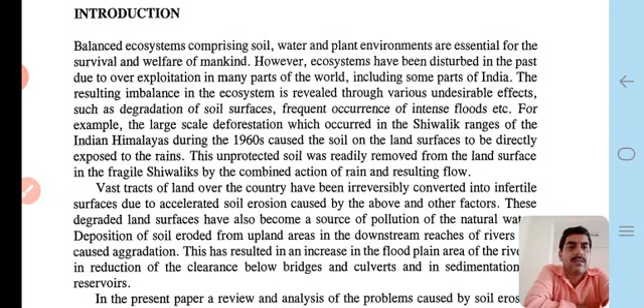The large scale deforestation which occurred in the Shivalik range of the Indian Himalayas during the 1960s era caused the soil on the land surfaces to be directly exposed to rain. This unprotected soil was readily removed from the land surface in the fragile Shivaliks by the combined action of rain and resulting flow.

Vast tracts of land over the country have been irreversibly converted into infertile surfaces due to accelerated soil erosion caused by the above and other factors.

These degraded land surfaces have also become a source of pollution of natural water. Deposition of soil eroded from upland areas in the downstream reaches of rivers has caused aggradation. This has resulted in an increase in the floodplain areas of the rivers, reduction of clearance below bridges and culverts, and sedimentation of reservoirs.

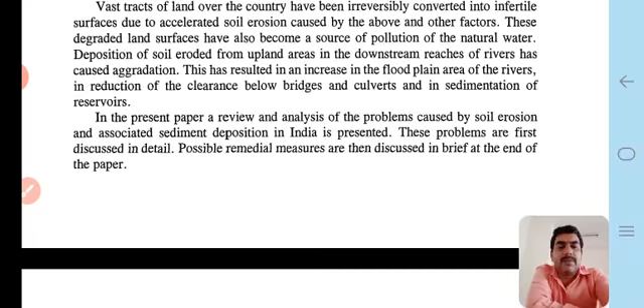Problems caused by soil erosion: in India, a total of 17,50,000 kilometers square out of the total land area of 3,280,000 kilometers square is prone to soil erosion.

This data is India's data. Thus, about 53% of the total land area of India is prone to erosion. Narayana and Ram Babu also discussed this in their research in 1983.

Areas affected by soil erosion in India can be broadly grouped into two categories: firstly the Himalayan and lower Himalayan regions, and secondly other regions. Two types of region occur here: the Himalayan and lower Himalayan region,

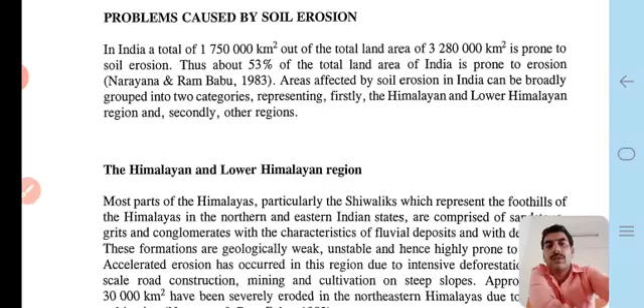most parts of the Himalayas, particularly the Shivaliks, which represent the foothills of the Himalayas in the northern and eastern Indian states, are comprised of sandstone, grits and conglomerates with the characteristics of fluvial deposits and deep soils. These formations are geologically weak, unstable, and hence highly prone to erosion.

This type of soil is erosion-prone, easily eroded. Accelerated erosion has occurred in this region due to intensive deforestation, large scale road construction, mining and cultivation on steep slopes.

Approximately 30,000 kilometers square have been severely eroded in the northeastern Himalayas due to shifting cultivation, as reported in the Narayana and Ram Babu paper published in 1983.

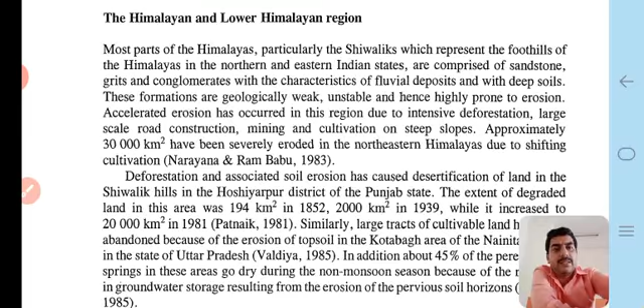Deforestation and associated soil erosion has caused desertification of land in the Shivalik Hills in Hoshiarpur district of Punjab state. The extent of degraded land in the area was 194 km square in 1852, 2000 km square in 1939, while it increased to 20,000 km square in 1981, as per Patnaik's research paper.

Uttar Pradesh, Valdiya 1985: in addition, about 45% of the perennial hill springs in these areas go dry during the non-monsoon seasons; only in the monsoon season are they in wet conditions. This is because of the reduction in groundwater storage resulting from the erosion of the pervious soil horizons, as published by Valdiya in 1985 in a journal paper.

Landslides are another dominant cause of soil erosion and related problems in the Himalayas, as shown in the figure provided in the map on the next slide.

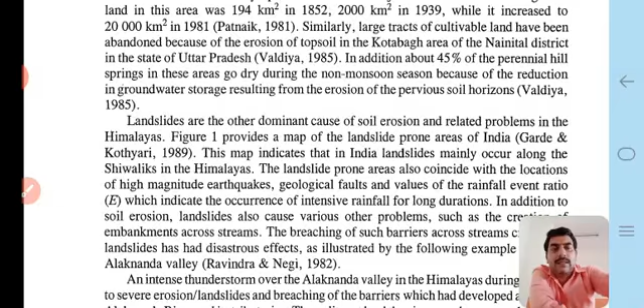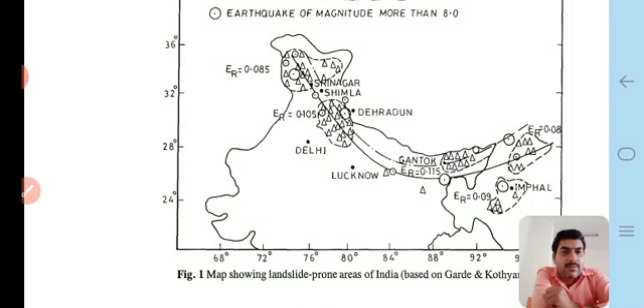In the next slide, this is the Himalaya region, showing earthquakes of magnitude more than 8 on the Richter scale. There is a map showing landslide-prone areas of India based on Garde & Kothyari, Gangtok, Dehradun region, which can be seen here in this region, and this region.

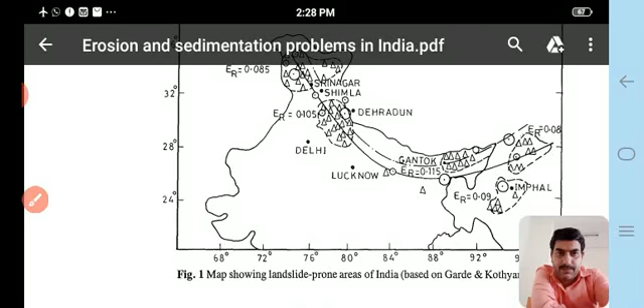Okay, they all are basically soil erosion prone areas, where the soil is eroded easily by the condition of the monsoon.

Thus, the upper Ganga canal, which diverts water from the Ganga at Haridwar, had to carry a very heavy sediment load. The consequences of the heavy sediment load entering the canal are discussed in the next slides.

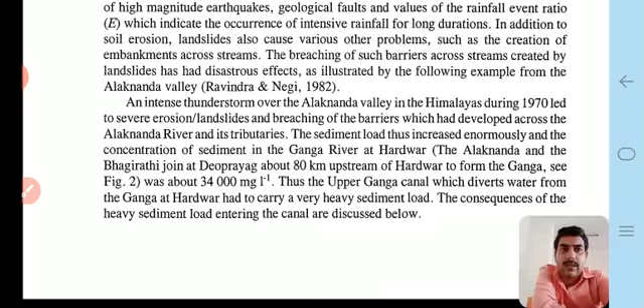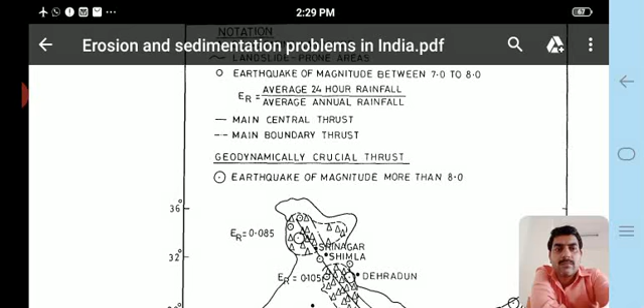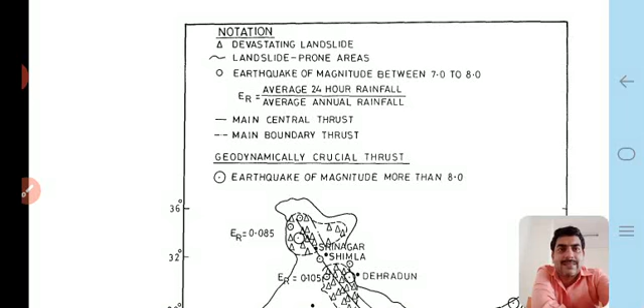Notations: the delta sign denotes, which you see here, okay, devastating landslides. The zigzag line shows landslide prone areas. Circles represent earthquakes of magnitude between 7 and 8, and ER is the average 24 hour rainfall upon the average annual rainfall.

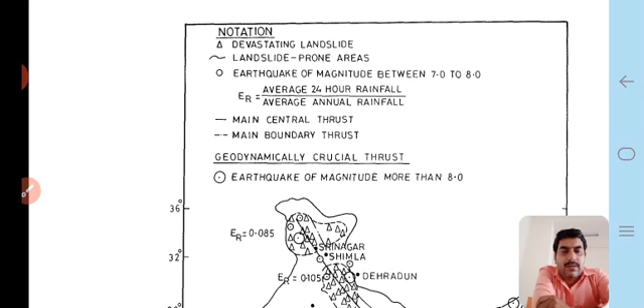The main central thrust is the clear line, and the dotted line is the main boundary thrust. Geodynamically, the crucial thrust is represented by a circle and below, in between, a dotted line.

The other regions of India affected by severe erosion include the severely eroded gullied lands along the banks of the rivers Yamuna, Chambal, Mahi, and other west flowing rivers in Gujarat state, and the southern rivers, namely the Cauvery and the Godavari river systems. Sheet and rill erosion is the most severe problem in the catchments of these rivers.

As a result, agricultural production is greatly affected on the red soils, which cover an area of 7,20,000 km² in the basins of the Chambal and Godavari. The depth of these soils is limited to 200 millimeters. In most of these areas, the lateritic soils, which are associated with rolling and undulating topography, have been found to lose about 4,000 ton km⁻² of valuable topsoil annually due to erosion in peninsular India, per research by Ram Babu.

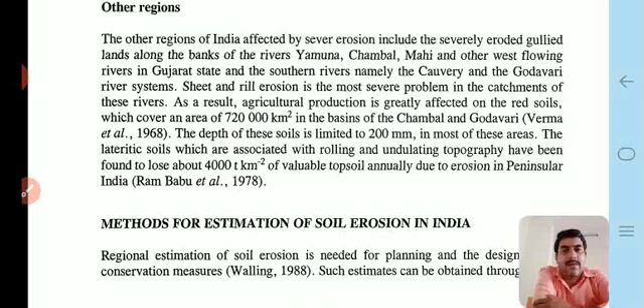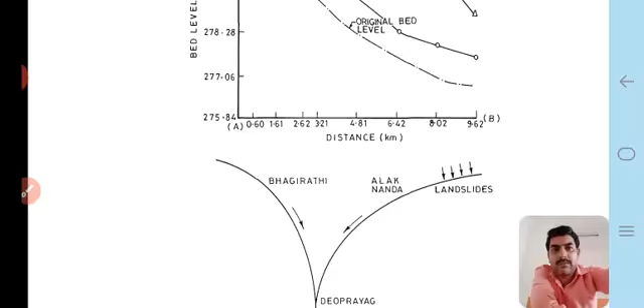Methods for estimation of soil erosion in India. Many methods here. Measurement through the use of estimation procedures, surveys for determination of soil erosion rates from catchments and deposition rates in reservoirs are frequently conducted by various governmental agencies in India, that is the ICAR and CBIP. Measurements of sediment load are made in many rivers across the country by other government agencies, that is the Central Water Commission.

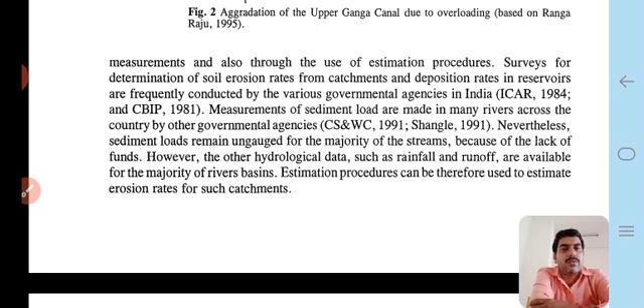All are to calculate how sediment is deposited in that particular region of the water bodies. However, other hydrological data such as rainfall and runoff are available for the majority of rivers. Basin estimation procedures can therefore be used to estimate erosion rates for such catchment areas. Okay,

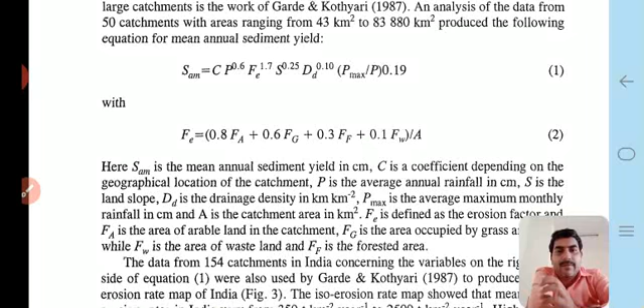and this is the basic formula to calculate the sediment yield, that is the SAM. Mean annual sediment yield in centimeters is equal to C P to the power 0.6, Fe 1.7, S 0.25, and Dd 0.1, and within bracket P max upon P, multiplied by 0.19. Okay, where Fe is 0.8 Fa plus 0.6 Fg plus 0.3 Ff plus 0.1 Fw upon A, where all notations are explained below. C is a coefficient depending on the geographical location of the particular catchment area.

P is the average annual rainfall in centimeters. S is the land slope. Dd is the drainage density in km⁻². P max is the average maximum monthly rainfall in centimeters, and A is the catchment area in km². Fe is defined as the erosion factor, and Fa is the area of arable land in the catchment. Fg is the area occupied by grass and scrub, while Fw is the area of wasteland, and Ff is the forested area. All notations represented in the formula are explained above.

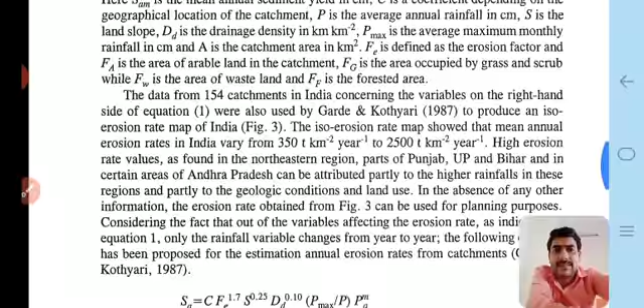The data from 154 catchments in India concerning the variables on the right hand side of equation 1, and now high erosion rate values are found in the north eastern region, parts of Punjab, UP, Bihar and certain areas of Andhra Pradesh. The formula is below here.

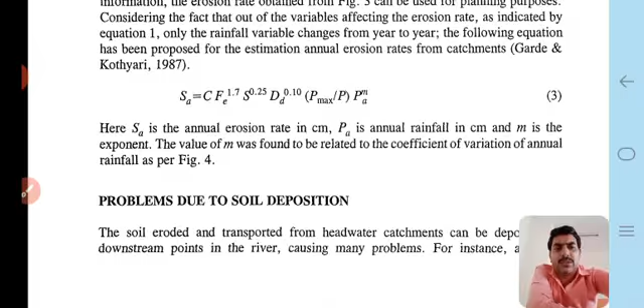Now, problems due to soil deposition. What problems occur when soil is deposited in water bodies? The soil eroded and transported from headwater catchments can be deposited at downstream points in the river or any water bodies, causing many problems. For instance, a bridge, which is shown in the map. Okay, and this is the problem of sedimentation in water bodies like a reservoir, etc.

Remedial measures for soil erosion. The general problems due to soil erosion and deposition illustrated above are worldwide problems. It is not a small area problem, it is a worldwide problem and not restricted to India. However, for sustainable development, it will be essential to thoroughly understand and solve these problems.

For this purpose, a detailed screening analysis should first be carried out to identify areas of severe erosion and sedimentation sites. A greater number of streams will have to be gauged to determine their sediment loads. Also, detailed reservoir surveys will have to be carried out. Next, priority catchments and reservoirs may be selected for experimentation to study the effectiveness of soil conservation measures and reservoir operation policies.

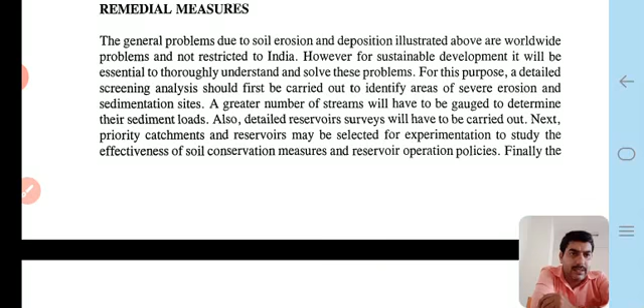And finally, the technologies thus developed for sediment management could be transported by expanding these sediment management activities to the other catchment and reservoir. Various programs of soil conservation are currently receiving high priority in India. However, it seems to be a difficult task to control erosion over vast tracts of lands by soil conservation practices alone.

Nevertheless, the problem of reservoir sedimentation can be brought under control by construction of upstream sediment traps and by evolving effective procedures for sediment routing and sediment removal from existing reservoirs facing the sedimentation problem. Okay.

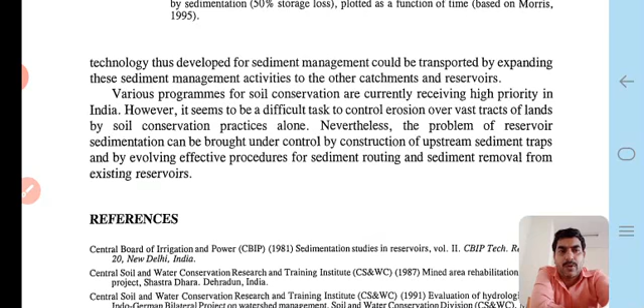Now, sediments: measurement of sedimentation. How to measure the sedimentation? Firstly, erosion occurred, and secondly, it is deposited by the water bodies. That is the sedimentation or deposition.

Sediments play an important role in elemental cycling in the aquatic environment. They are responsible for transporting a significant proportion of the many nutrients and contaminants. They also mediate their uptake, storage, release, and transfer between environmental compartments. Most sediment in surface water derives from surface erosion and comprises a mineral component arising from the erosion of bedrock and an organic component arising during soil formation processes.

For the purposes of aquatic monitoring, the sediment can be classified as deposited or suspended, two parts. Deposited sediment is that found on the bed of a river or lake. Suspended sediment is that found in the water column where it is being transported by water movements. Okay.

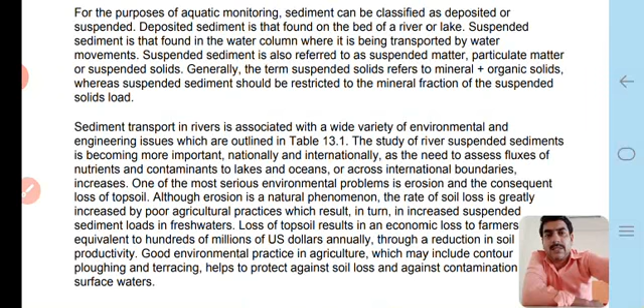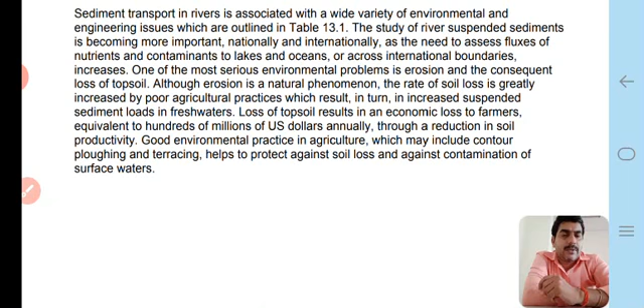Sediment transport in rivers is associated with a wide variety of environmental and engineering issues, which are outlined in the table given below. Good environmental practices in agriculture, which may include contour ploughing and terracing, help to protect against soil loss and against contamination of surface water.

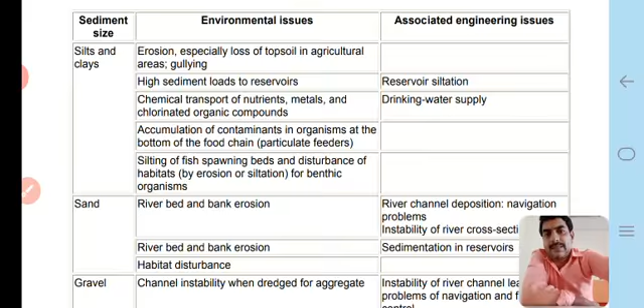The second is sand: riverbed and bank erosion. If sand is present, riverbed and bank are both eroded. River channel deposition, navigation problems, instability of river cross sections, that is, unstable river conditions. Riverbed and bank erosion, sedimentation in reservoirs.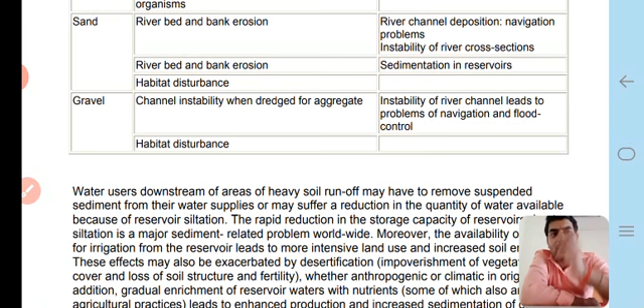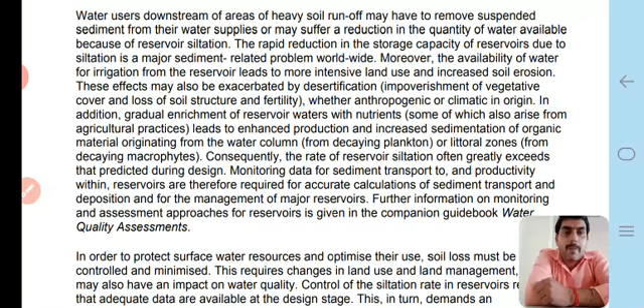Habitat disturbance occurs. Gravel: channel instability when dredged for aggregate, that is, instability of the river channel leads to problems of navigation and flood control. Habitat disturbance. Okay, so overall in the table we see that all are problems developed by erosion, soil erosion in reservoirs, rivers or water streams. Okay.

Now, types of sediment transport. Suspended load comprises sand plus silt plus clay sized particles that are held in suspension because of the turbulence of the water, and the suspended load is further divided into the wash load, which is generally considered to be the silt plus clay sized material less than 62 micrometer in particle diameter and is often referred to as fine grained sediment. The wash load is mainly controlled by the supply of the material. Usually the remaining size is greater than 62 micrometer in particle size.

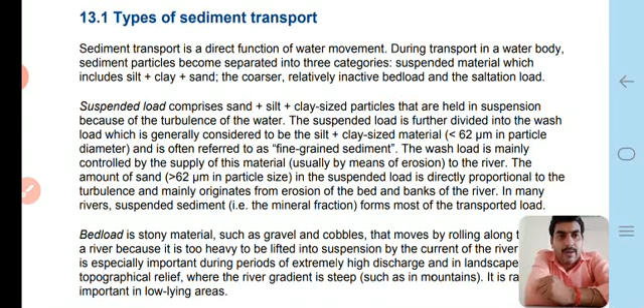In many rivers suspended sediment, that is the mineral fraction, forms most of the transported load in the sedimentation process. Sedimentation measurement: how to measure the sedimentation? While the underlying theory is well known, the measurement of sediment transport requires that many simplifying assumptions are made. This is largely because sediment transport is a dynamic phenomenon, not a stationary one, and measurement techniques cannot register the ever-changing conditions that exist in water bodies.

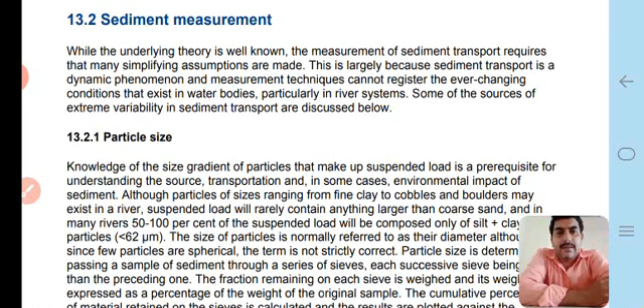Particularly in river systems, some of the sources of extreme variability in sediment transport are discussed below. The first one is particle size, and particle size is given in the table. Particle description: cobble, particle size 256 to 64 millimeter, which are called cobbles. Non-cohesive property, because they are larger in size.

Gravel, particle size range 64 millimeter to 2 millimeter. Very coarse sand, size 2 millimeter to 1 millimeter, non-cohesive sediment property. Okay.

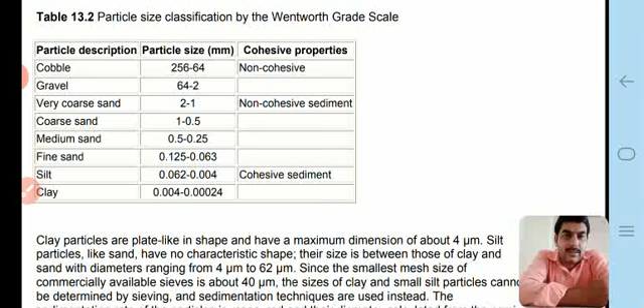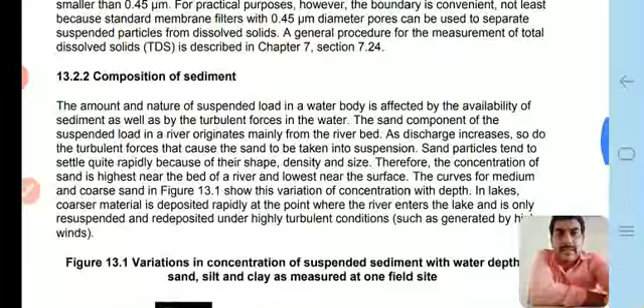Coarse sand 1 to 0.5 millimeter, medium sand 0.5 to 0.25 millimeter, fine sand 0.125 to 0.063 millimeter, silt 0.062 to 0.004 millimeter, that is the cohesive sediment. And the last one is the clay size. Clay size is 0.004 to 0.00024 millimeter. The above all are the particle size distributions which are present in our sediment deposition criteria.

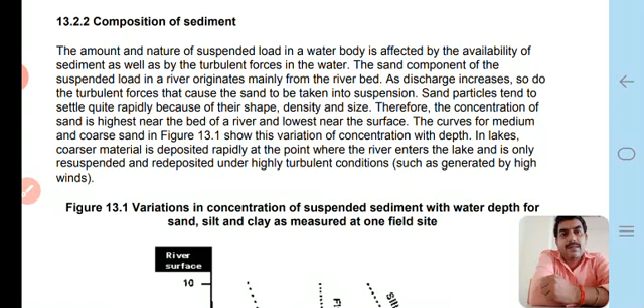Composition of sediment. The amount and nature of suspended load in water bodies is affected by the availability of sediment as well as by the turbulent forces in the water. The sand component of the suspended load in a river originates mainly from the river bed. Variation in concentration of suspended sediments with water depth of sand, silt and clay as measured is shown in the graph, which is here river bed and here depth of the water in meter.

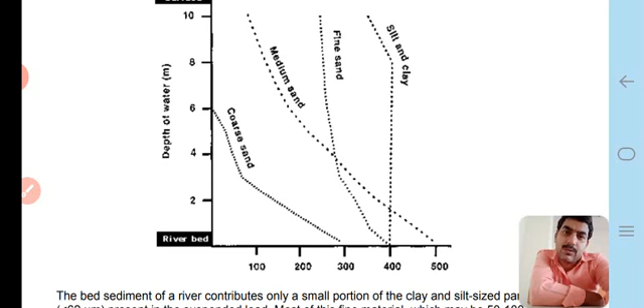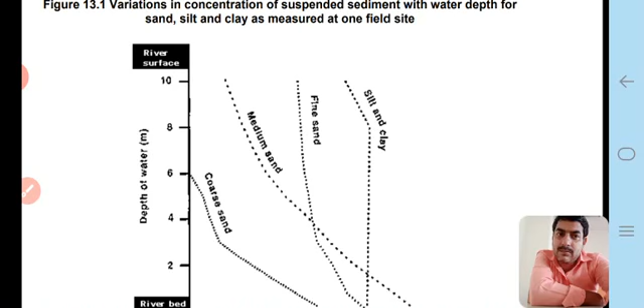Coarse sand up to 6 meter is to be sedimented. Medium sand up to 10, fine. Okay, all different criteria of the particle size to be deposited in all other types of shape, and the graph represents

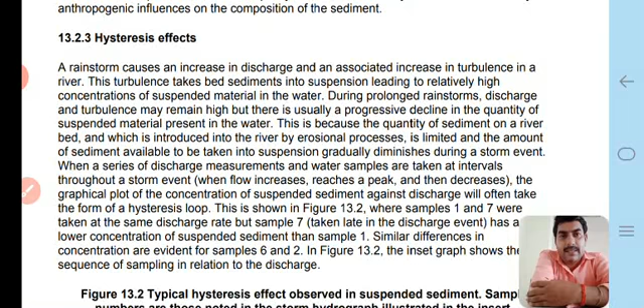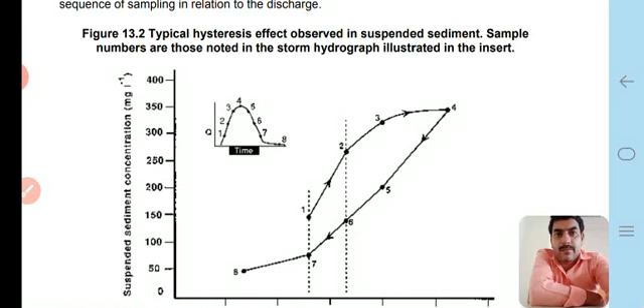hysteresis effects. A rainstorm causes an increase in discharge and an associated increase in turbulence in a river. This turbulence takes bed sediments into suspension, leading to relatively high concentrations of suspended material in the water. Some typical hysteresis effects observed in suspended sediment. Sample numbers are those noted in the storm hydrograph illustrated in the insert.

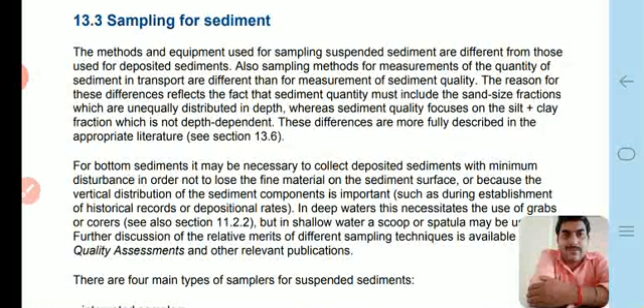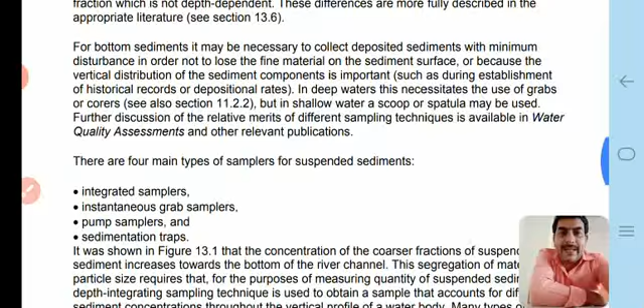Sampling for sediment. The methods and equipment used for sampling suspended sediment are different from those used for deposited sediments. Also, sampling methods for measurements of the quantity of sediment in transport are different than for measurement of sediment quality. There are four main types of samplers for suspended sediments: integrated samplers, instantaneous grab samplers, pump samplers, and sedimentation traps. Four types of sampler we are using.

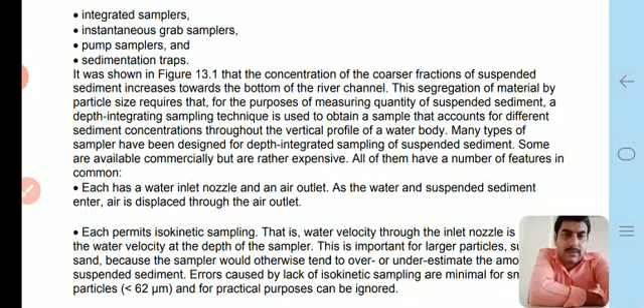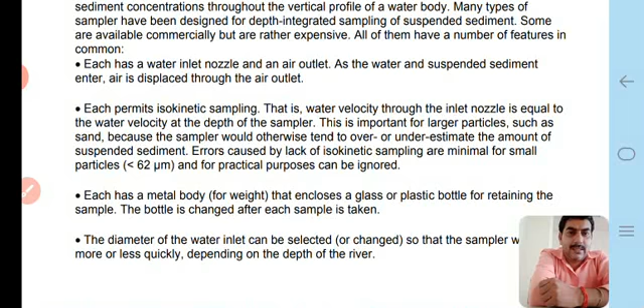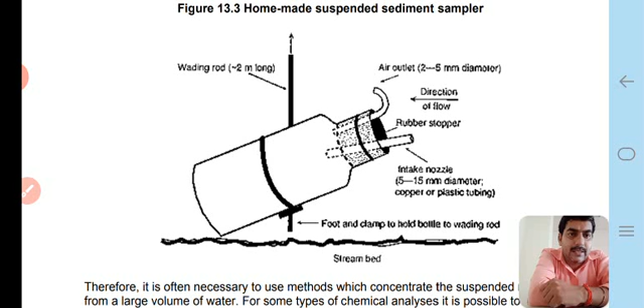Wading rod up to 2 meter long, attached to the container, and it is fitted to the stream bed level, that is the foot, and a clamp to hold the bottle to the wading rod. Intake nozzles 5 to 15 millimeter diameter, copper or plastic tubing, air vent outlet pipe 2 to 5 millimeter diameter, direction of flow. It is to be fitted in the given water bottle sampler.

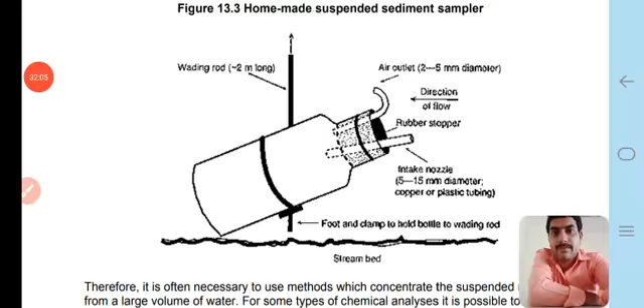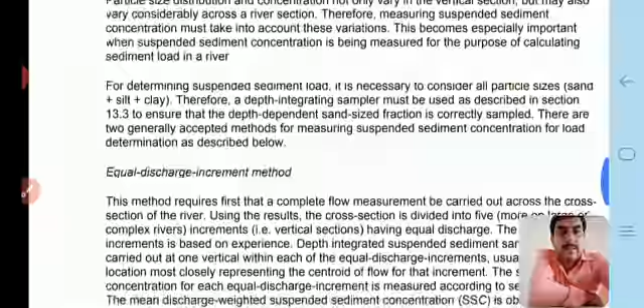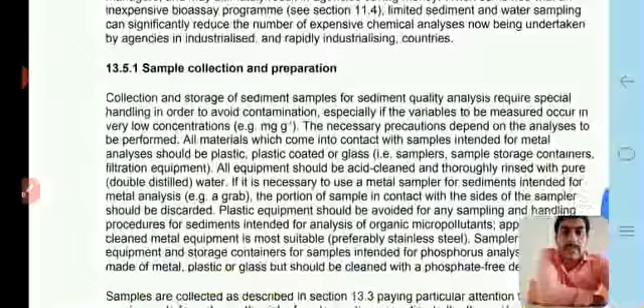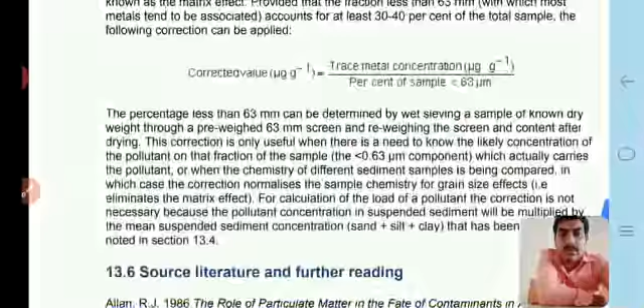Now, measurement of suspended sediments, that is the particle size of sand plus silt plus clay. Three combinations are given here, which are the formulas for the calculation of the sediment parts. All are formulas for estimating suspended sediment concentrations, sediment quality, and now sample collection or preparation, how to prepare to collect the sample, which is seen here. The source of all slides. The results of sediment quality analysis are usually expressed as milligram per gram dry weight, or milligram per liter of sample volume.

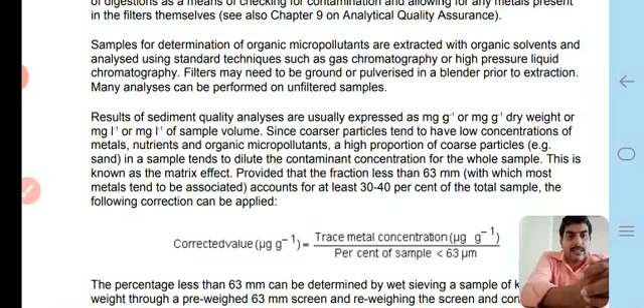Since coarser particles tend to have low concentrations of metals, nutrients and organic micropollutants, a high proportion of coarse particles, for example sand, in a sample tends to dilute the contaminant concentration for the whole sample. This is known as the matrix effect. Provided that the fraction less than 63 micrometer, with which most metals tend to be associated, accounts for at least 30 to 40% of the total sample, the following correction can be applied: corrected value in microgram per gram equals trace metal concentration in microgram per gram divided by percent of sample less than 63 micrometer.

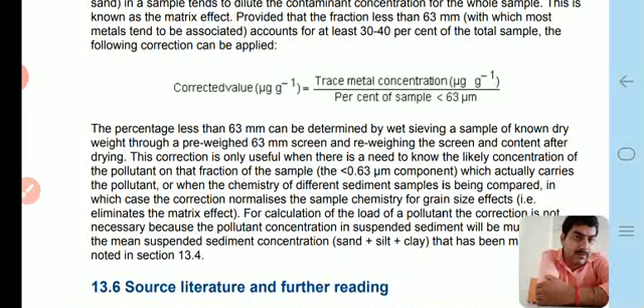The percentage less than 63 micrometer can be determined by wet sieving a sample of known dry weight through a pre-weighed 63 micrometer screen and reweighing the screen and content after drying. This correction is only useful when there is a need to know the likely concentration of the pollutant on that fraction of the sample, the less than 63 micrometer component, which actually carries the pollutants, or when the chemistry of different sediment samples is being compared, in which case the correction normalizes the sample chemistry for grain size effects, that is, it eliminates the matrix effect.

Okay, therefore we conclude the complete topic, that is sediment erosion and sedimentation. After erosion, the next step is the deposition or sedimentation process, because any river, any stream, any water body has silt, sand, clay in the suspended part, therefore it is deposited after some time due to Stokes' law and with the help of Newton's law. Okay.